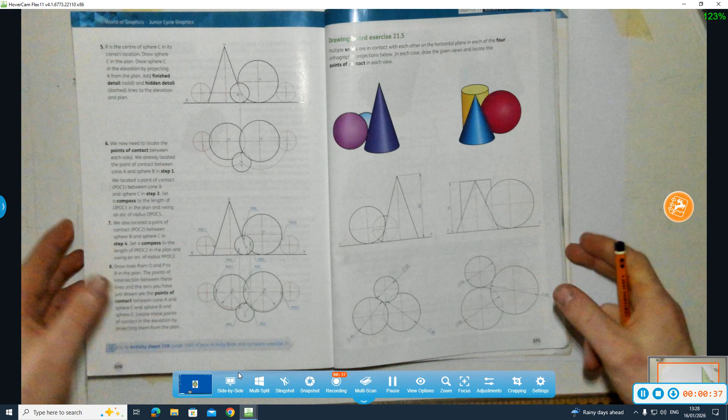So what we're going to do first of all is set up the cone and the big sphere here in plan and elevation, because they're side by side, they're easier to set up. It gives us the diameter for the cone here, and the height of the cone. So I'm going to draw that first, starting with my plan of the cone just to be more accurate.

So it's a diameter of 48, which is radius 24. I'm drawing that in my plan. The height of the cone is 80. So that's our cone drawn in plan and elevation.

Now we need to draw a sphere over here, the big sphere that's in contact with the cone. The radius of the sphere is 23. So what we're going to do, from the edge of the cone, from the side of the cone, we're going to measure out 23.

Do a little mark, and we're going to go parallel to the edge of the cone. I'm going to come over here then to the side slightly, and draw a straight line up. On that I'm going to measure 23 again, and bring that straight across until it hits my parallel line I drew recently.

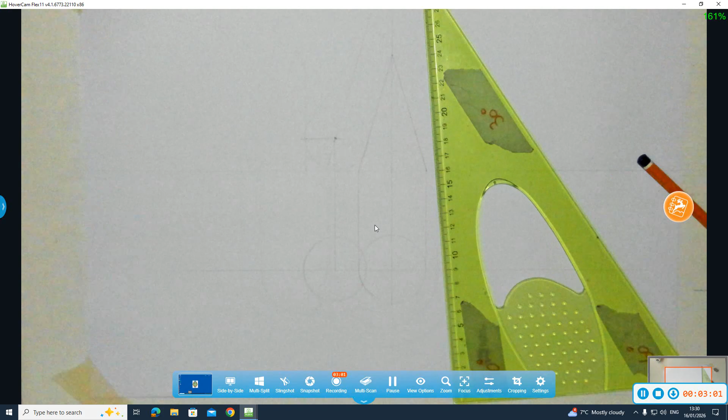So that's drawn in there in the plan, right? I'm going to zoom in slightly with this here. Okay, so that's our plan and elevation of our cone and our big sphere, right?

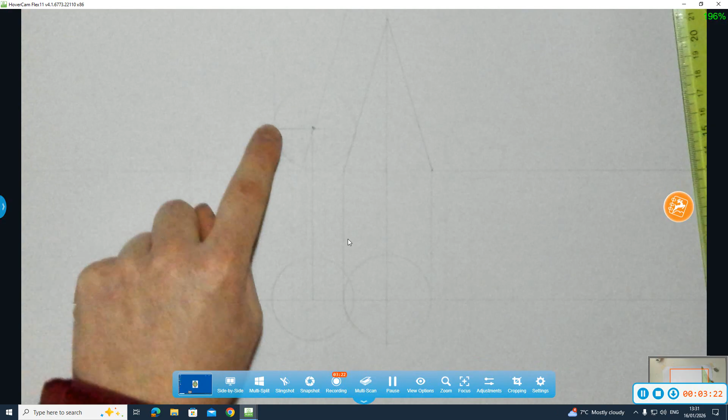Now we need to draw this small sphere that's hidden at the back here, okay? The way we're going to have to do that, we're going to draw a construction sphere out here in contact with the cone, and a construction sphere out here in contact with the other sphere. We'll be able to bring them down and rotate them around, find it in plan and bring it up and find it here in the elevation.

I'm going to deal with the cone first of all, okay? So I want to do that construction sphere in contact here, right? So the radius of the construction sphere is 32 - or the diameter, sorry - so the radius is 16.

So from the side of the cone I'm going to step out 16 millimeters, go parallel to the side of the cone. I'm going to draw a straight line up here from the ground, and on that I'm going to measure 16, and we can go straight across here into the intersect. So that now is the center point for that construction sphere in contact with the cone.

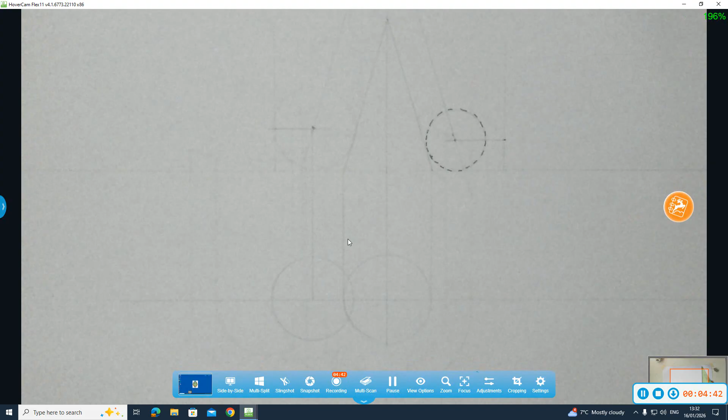Okay, I'm going to do that in green dotted now again, just so it stands out that bit better to you. So that's my construction sphere there in elevation, in contact with the cone.

We bring it down here to the center line, bring it down to the center line. It's in contact with the cone now, remember, so we put the point of the compass here in the center of the cone, extend it to the blue, and swing it around.

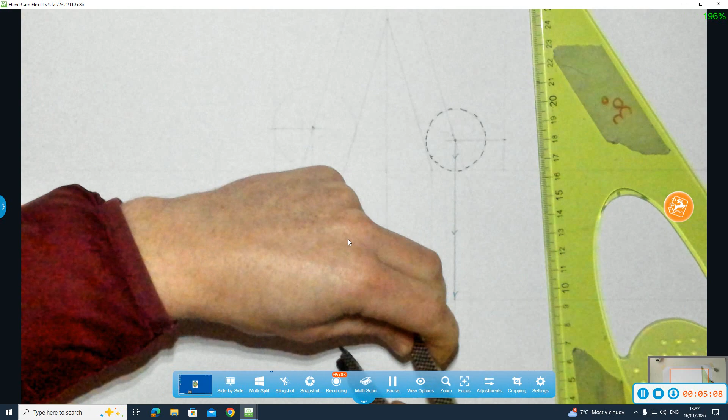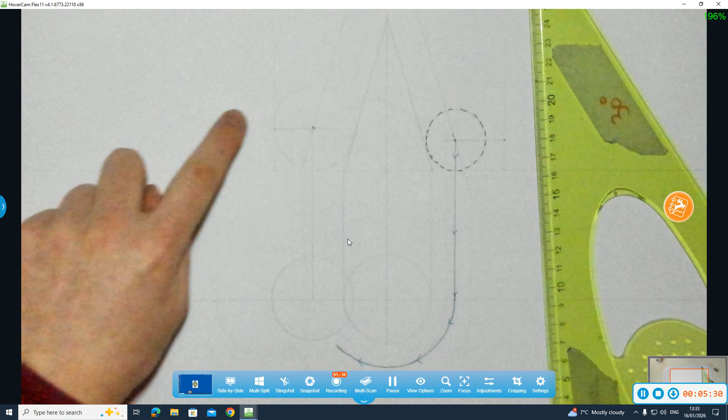Okay, so that's that job done now for the moment. Now we need to draw a construction sphere over here in contact with this sphere we have. So what we're going to have to do is add the radius of the big sphere and the radius of the small sphere.

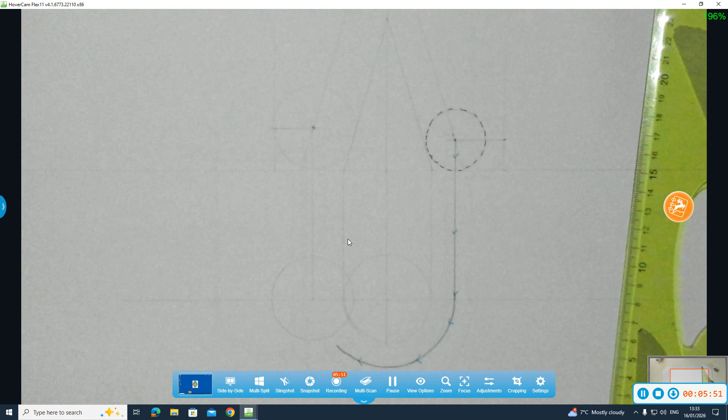So the small sphere is radius 16, plus the big sphere, which was radius 23. So that gives us a radius of 39.

Okay, so we're setting 39 on our compass from the center of the sphere here.

Swinging our arc there then, we draw over here to the side, draw a line straight up. And on that we're going to measure 16. You can also just come straight across from this one if you want, because that's 16 as well, so I'm going to come straight across 16. Where that and the arc meet is that point there.

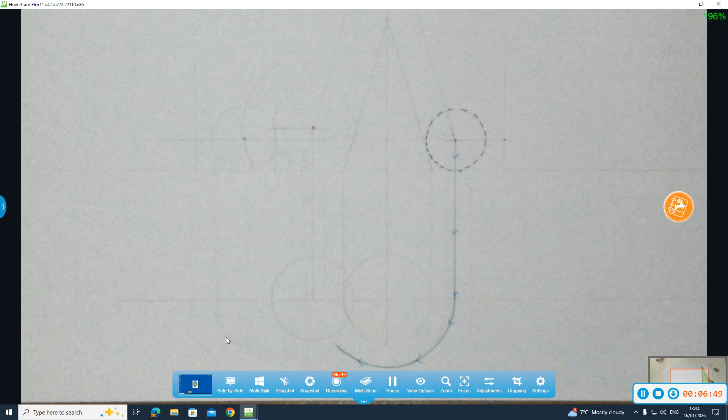That now is the center of our construction circle, the center of our construction sphere in contact with the other sphere. So I'm going to draw it in here. Now I'm going to get my green and do this in dash so it stands out to you that it's the construction one.

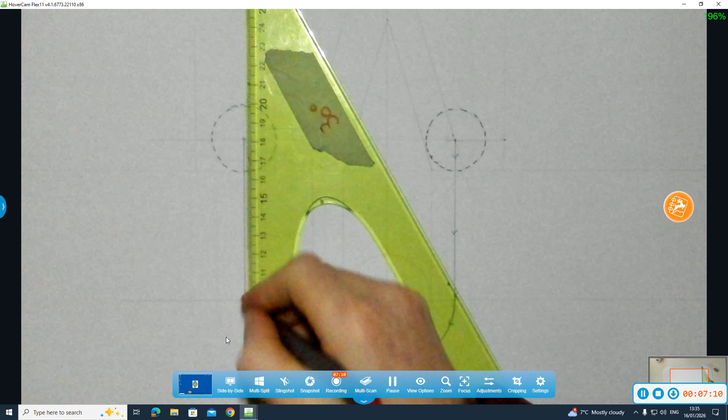Same as previously now, okay? We bring the center of that down to his center line. Point the compass, goes in the middle of this bigger sphere, extend it to here, swing it around, and what you'll find is they intersect then.

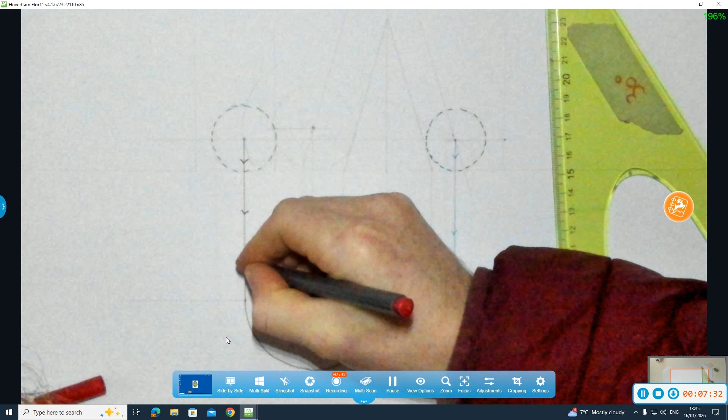So that's our intersection there, right? Where they intersect is the center of that small sphere in plan. So again, we set our compass to the radius, which is 16. That's our center point, so we can draw that in.

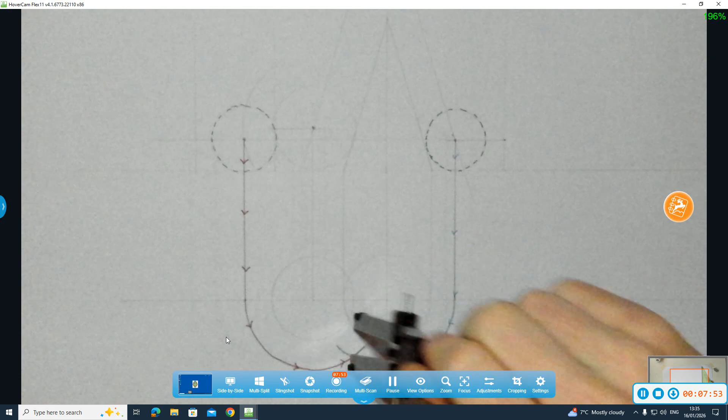We bring that center point straight up here in elevation, and just bring across the height of those circles because they don't change. So I'll bring across the height, which is here. That's the circle here then in elevation.

That's dotted, remember, because it's behind. It's behind all the other ones. Okay, so what we're left with now is our points of contact, okay?

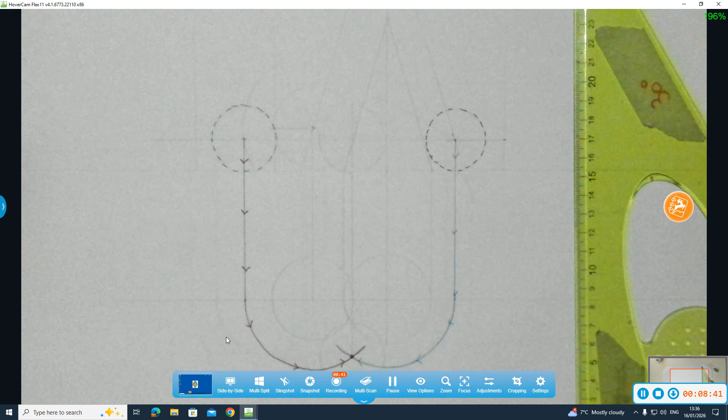So, first one is first, the cone and the big sphere. We're going to find out that one first because it's probably the easiest to find, right? The cone and the bigger sphere here. You go perpendicular to the side of the cone from the center of the sphere.

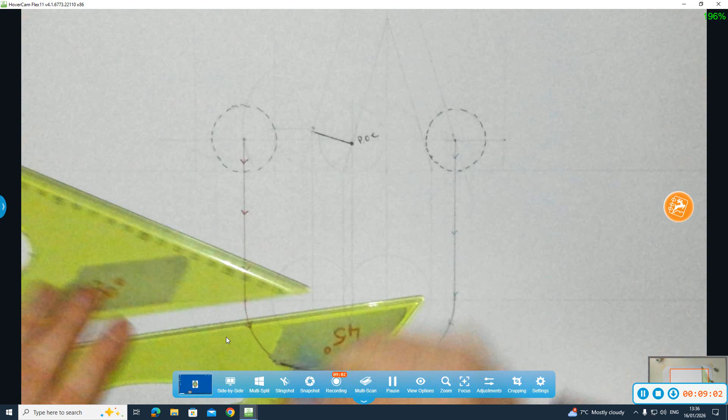That's one point of contact there. You drop that straight down then till it hits that center line, and that's the point of contact in plan. So that's that one dealt with.

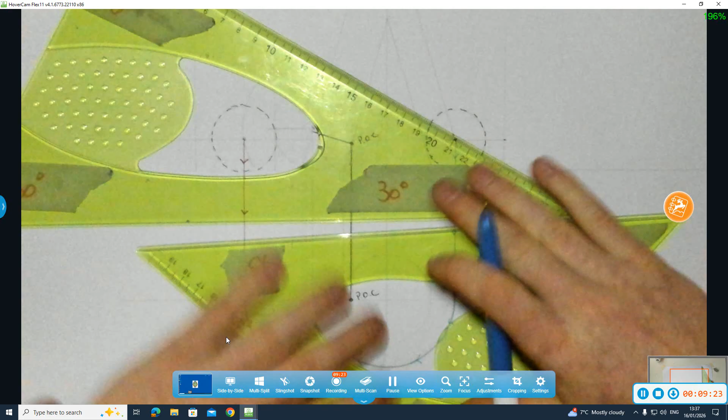Now we're going to deal with the cone and the smaller sphere. Okay? The cone and the small sphere. So to get the point of contact in that, again, you have to go perpendicular to the side of the cone from the construction sphere here we drew. Where that hits the cone, you bring it down to the center line here.

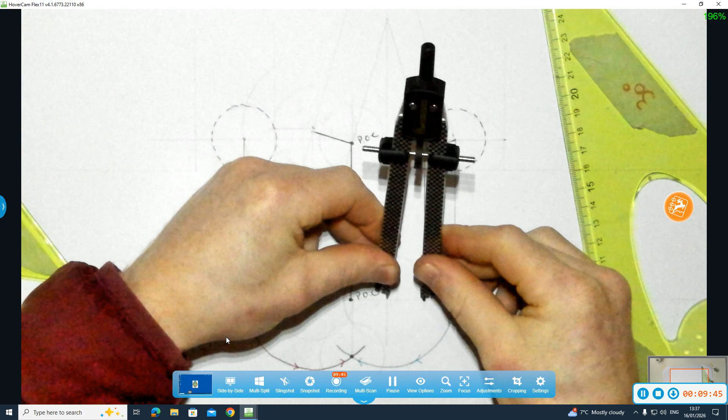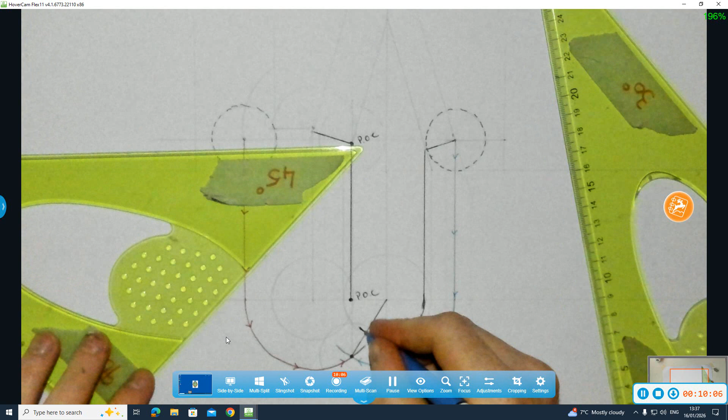You rotate that point around, point the compass here in the center, rotate that around. And you join the two centers together, the center of the cone and the center of the smaller sphere. Where it meets that arc we just drew, that's your point of contact there. So that now is the point of contact between the cone and that small sphere.

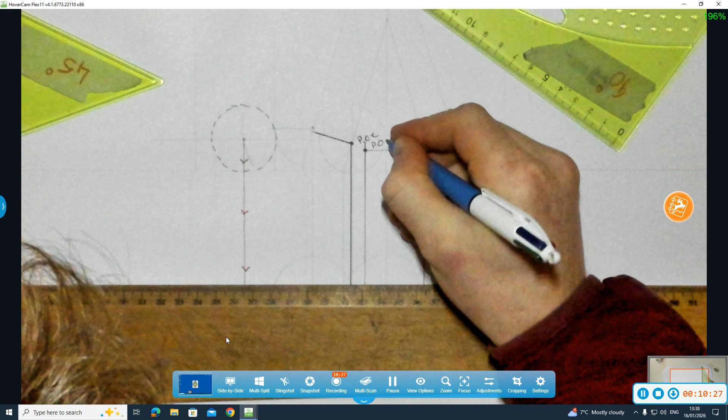You bring it back up here to elevation, and the height stays the same. So you're bringing the height across from this point here, and then you found this first construction point of contact. So that's our point of contact with that one. Now we've defined it between the two spheres.

Well, to find the point of contact between the two spheres, you join the centers of the spheres. So you join the construction sphere with the bigger sphere. Where they meet, which is there, you drop that down to plan, down to here. You rotate it around.

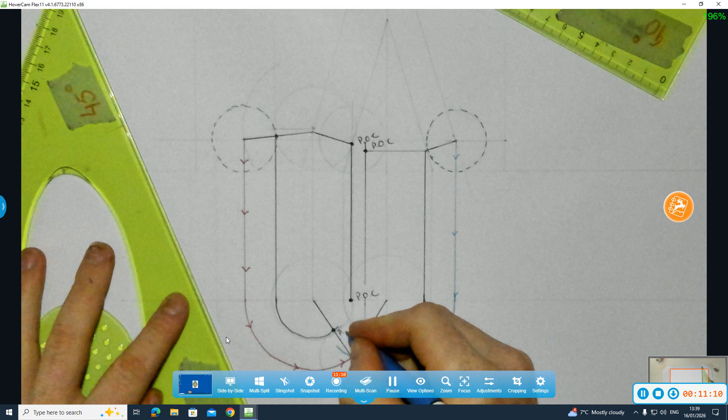So you rotate that around. And again, you join your two centers in plan. Where they cross, which is there, that's our point of contact. You bring it back up to your elevation. And the height stays the same, so you bring across this height over here. That's your point of contact for that one then.

Okay, so you have 6 points of contact there then in that. Yeah.